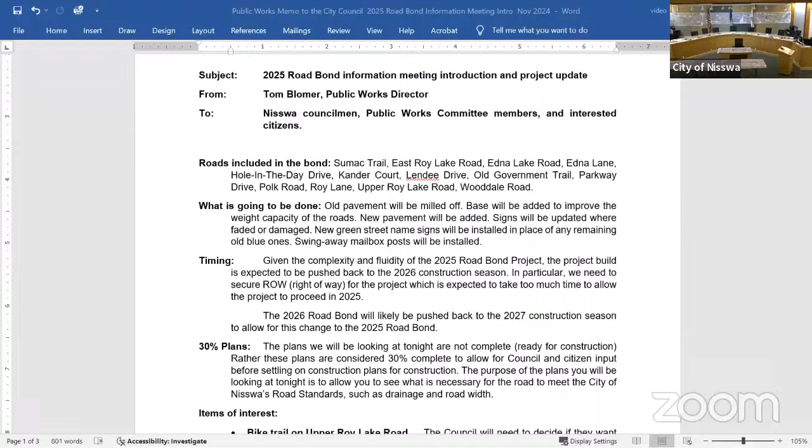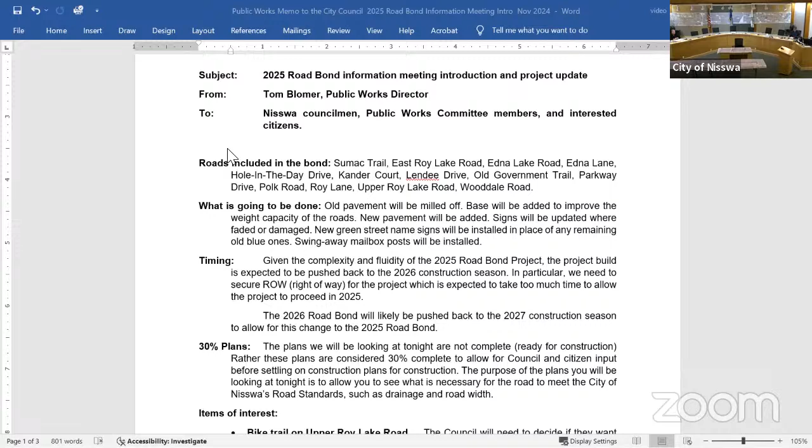So the first thing I would do is just let everyone know, and you probably are aware, the roads that are included in the bond. We're looking at repaving Sumac Trail, East Roy Lake Road, Edna Lake Road, Edna Lane, Hole in the Day Drive, Kander Court, Lendee Drive, Old Government Trail, Parkway Drive, Polk Road, Roy Lane, Upper Roy Lake Road, and Wooddale Road.

What the bond is hoping to do is we'll mill off old pavement, add base where necessary if there's been problems with the base of the road, or in some cases we'll be adding base to increase the load limit of the road.

You'll notice that in the springtime, a lot of our roads are posted as 5-ton right now. We've been going up to a 7-ton road with most of the roads that we've been resurfacing, and I think some of these will be getting that same treatment. Following the base correction, they will get a new surface put down.

Some other things that we would be doing with that, we'll be updating any of the signs that are worn out, faded, possibly damaged. If there's any street name signs out there that are still the old blue color, they're being updated to the same ones that the county uses, the green and white. They're a little bit bigger, a little easier to read.

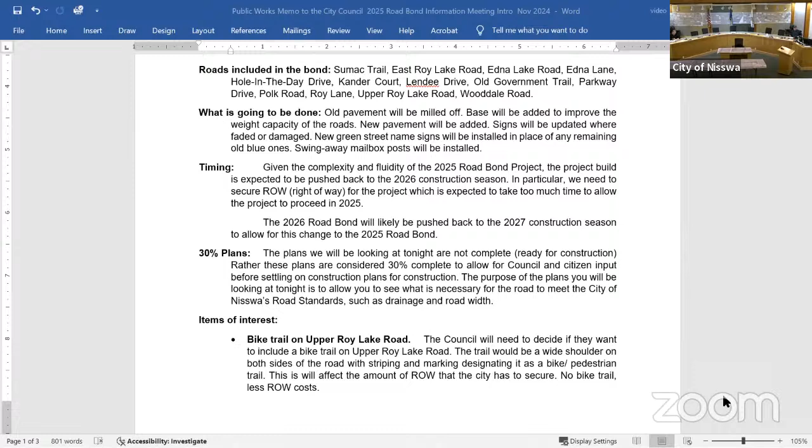Some things of interest I'd like you to be aware of: a bike trail has been proposed for Upper Roy Lake Road. That's not set in stone, but it's something we're considering, and there's a variety of reasons we're looking at that.

We would like to get your feedback on whether you believe that's a good idea or not, or if there's a type of bike path you'd prefer. Right now, what we're considering would simply be a wider shoulder on both sides, one-way traffic in each direction. It's only on Upper Roy that we're considering that at this time.

But if somebody here has a roadway you'd like to see a bike path on that's not being considered, please let us know. Either way is fine. Nothing is set yet, but we would like to get your input on that.

Other things, like I've alluded to already, there are issues with right-of-way acquisition. Most of the city streets in Nisswa don't have dedicated right-of-way, especially the older ones. They're there by what's called a prescriptive right, meaning they've been there for more than 15 years, and so they maintain a right-of-way by that.

When we go to look at right-of-way acquisition, the engineers will show where that acquisition is needed, and the city attorney will work on the best way to secure that, with the help of the surveyor from Widseth.

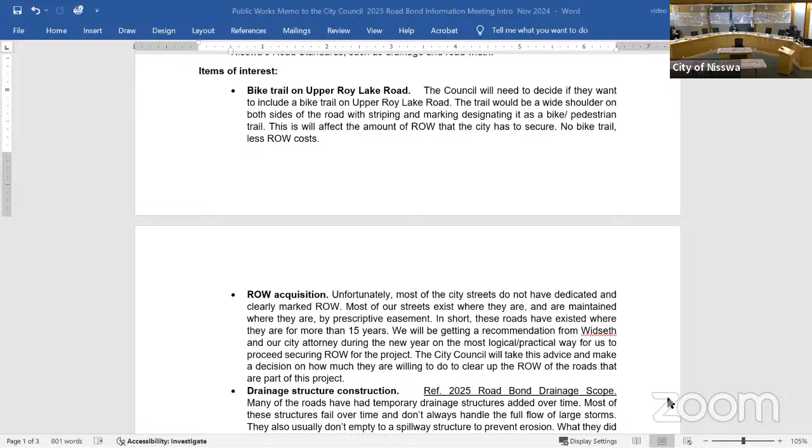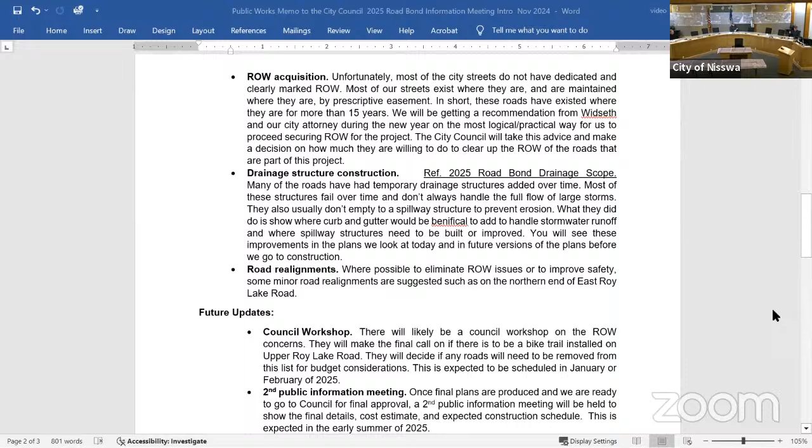Anyone where we believe we would need to acquire right-of-way will be contacted directly. You won't hear about it in a meeting like this. You'll be contacted either by phone or mail with the details where we would like to engage you about right-of-way.

Some other things to be aware of as you're looking at this: I think many of you are aware that there's asphalt gutters on a lot of the roads out there. For instance, Upper Roy and Edna Lake Road have asphalt gutters on the steep hills.

We're looking to add more permanent structures. Most of those asphalt gutters were added as afterthoughts; they were temporary in nature. Temporary in a lot of cases when it comes to roads can be 20 years old. But I think we're looking to do something more permanent to prevent erosion and handle heavy rainfall events better than what they have.

So if you see anything here that you have a question about, how we're handling that drainage, please let us know.

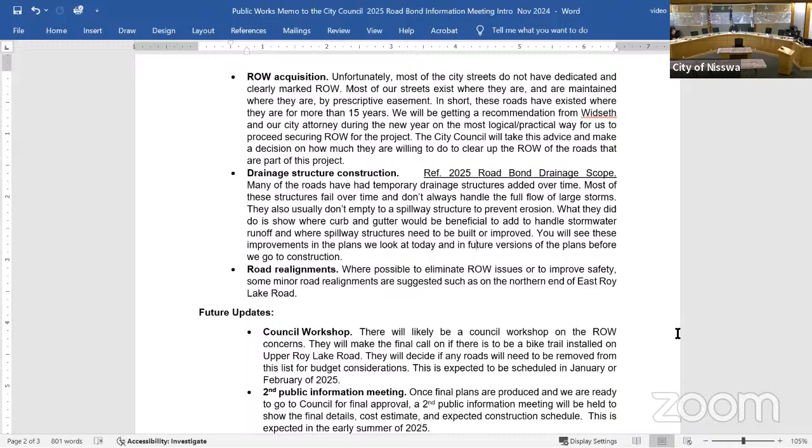One last thing to be aware of: there are some minor road realignments. In some cases, it's to eliminate some of the right-of-way issues I've talked about already. It may also be to improve safety, or simply improve visibility, or in a lot of cases you might have roads that come together at an angle other than 90 degrees, and in some cases we're trying to bring them together at 90 degrees, which is a safety issue.

One last thing, I want to give you an idea of what our future updates will be after this. Some of these right-of-way issues will be worked through with the city council in a workshop, either in January or February. That's subject to their approval and schedules, so I don't have a date for you yet on that.

As I mentioned earlier, before we go to final acceptance by the council, there'll be a second public information meeting like this, where you can see the changes made after your comments from tonight.

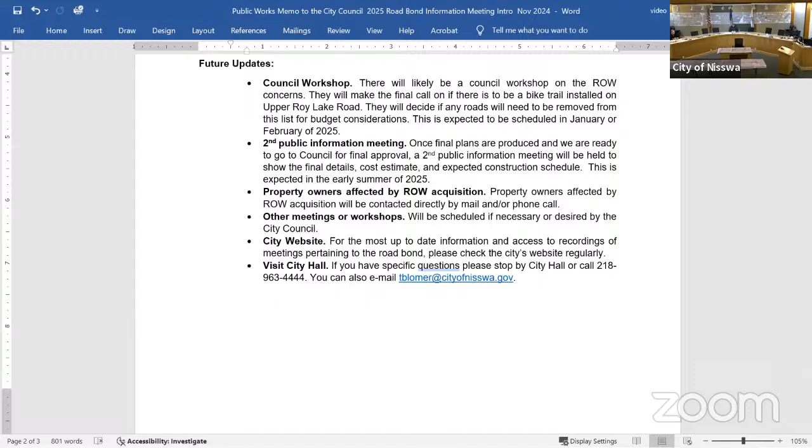Joe, do you have anything you'd like to say before I turn this over to Widseth? No, I don't think so. Do you want to go back and approve? Maybe one housekeeping thing, Joe — we'd like to approve the minutes from the October meeting before we move into the presentation. We have Cam and Galen here too, on Zoom. Second. I'll second. Thank you, Galen. Okay, minutes are accepted.

With that, Bill, do you want me to jump in with your presentation on the project? Sure, just sit here or doesn't matter? Whichever you prefer, if you want to be at the podium or there, whichever works better for you.

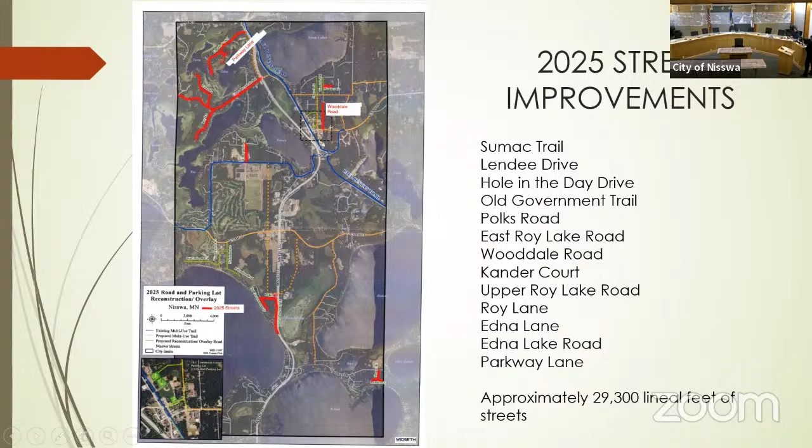Like Tom mentioned, some of the issues we looked at when doing this — the big one seems to be drainage for all the roadways. The other thing that popped its head up is right of way. So those are our biggest issues. I mean, other than that, there are always some little things that occur when we're doing the design — signs, utilities, stuff like that, that will always show up too.

Like you talked about drainage — one of the big things we look at is that when designing the roadway, coming up with an alignment and profile, we want to get the water off the roadway as quickly as possible, or prevent it from making it to the roadway at all. Ponding reduces the lifespan of the pavement, especially bituminous. Water and bituminous pavement don't really go together very well. It can deteriorate the pavement, get into the cracks, and cause structural damage which weakens the pavement — and that's when you see potholes and alligator cracking.

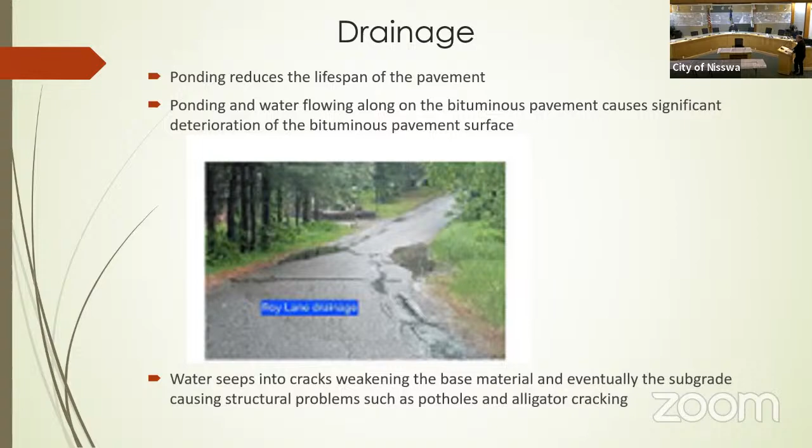One of the things we've noticed a lot when viewing the streets in Nisswa is kind of a bathtub effect — the water seems to drain towards the roadway, along the roadway, and then eventually drain off. But in this situation we show here, where the red line is the existing roadway, that's not the best situation. So that's some of the stuff we're trying to correct.

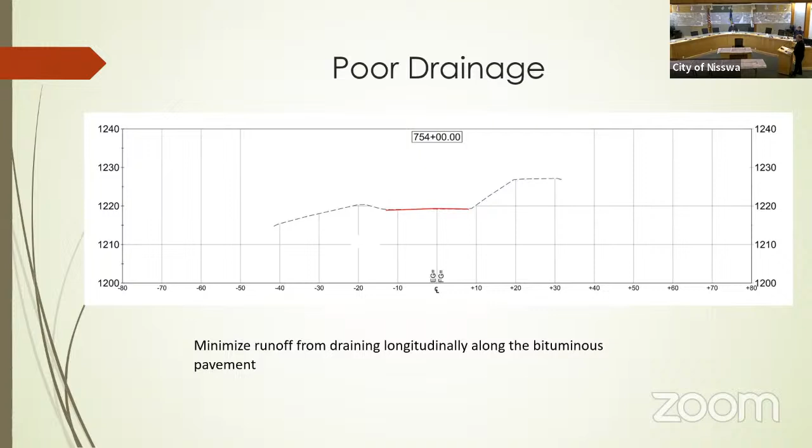Like Tom mentioned, we're going to try to control the runoff toward and along the paved surface of the roadway the best we can, using ditches. The ditches will be minimal depth, about a foot. If we get to a place where we need a culvert, the depth will increase in order to get the pipe under the road or under a driveway, maintaining roughly a foot of cover over the top of the pipe. And then we're going to add concrete curb and gutter.

Tom mentioned the bituminous gutters that were put in. Like I said before, bituminous isn't really meant to carry or transmit water very well — it deteriorates the fines on that surface, and over time it just breaks down. Whereas with concrete, you can set the grade a lot flatter, and it controls the runoff better and drains it away much more easily. A lot of times when you introduce concrete curb and gutter, you also have to add storm sewer in order to get the water off the road, out of the gutter, and into a ditch, pond, or some other location.

The other thing too is in a lot of areas the road is up a little bit higher and the grade slopes away. So we would maintain that, and the water would still drain the way it currently is draining right now.

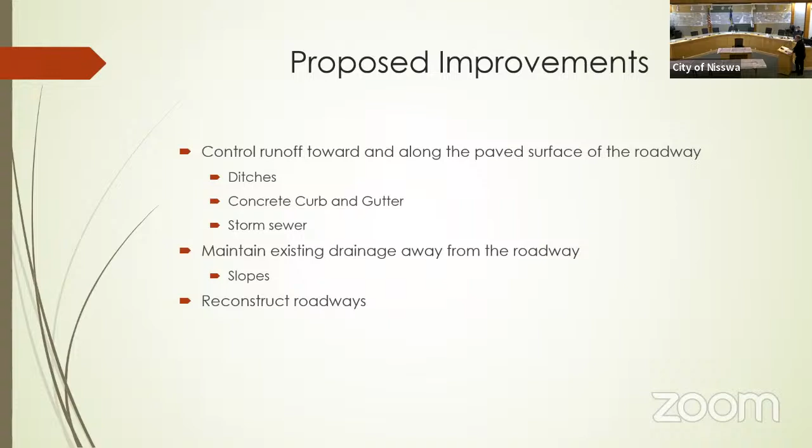For the most part, most of the roadways are all going to have a different setup, they may have a ditch, they may have curb and gutter, or they may slope away. And that's kind of what this picture shows.

The curb and gutter is usually put in to transmit the water up and down the roadway longitudinally, and also to reduce the amount of grading. The idea of the curb and gutter is that it minimizes the grading that has to occur behind it if there's a hill coming down.

So in this picture here, if we had to build a ditch where that curb and gutter is, we'd be out considerably further than what we're showing right now, based on looking at the other side of the roadway where a ditch is put in.

The city kind of wanted a little bit of a boulevard there so that the roadway or the grade doesn't come down to the back of curb, for snow storage and a place to put any signs that we needed.

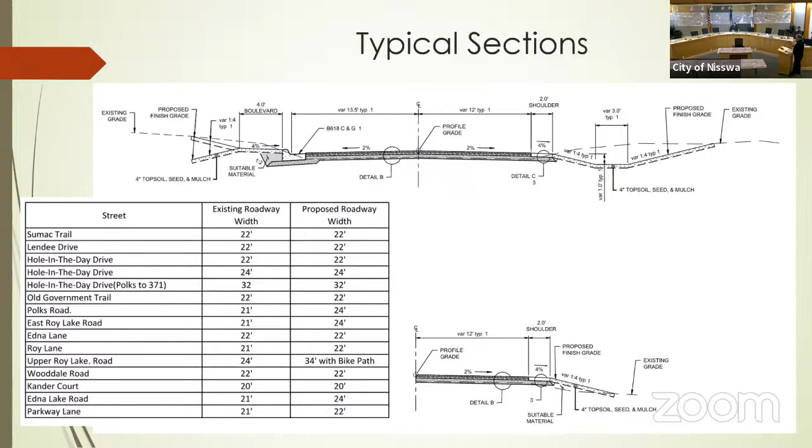That table kind of shows the proposed roadway widths for each street. Like I said, for the most part we're not really increasing them too much, except for Upper Roy Lake Road, which is the next picture.

So the typical section for Upper Roy Lake Road with the bike path is two 12-foot lanes, a 5-foot bike path on both sides. And then in some cases there's always going to be a shoulder, but in some cases it might be curb and gutter in order to match the grade on either side or to provide drainage.

5 foot is like for a bike path one way, that's the recommended width. It could be decreased to 4, but the recommended width is 5 feet.

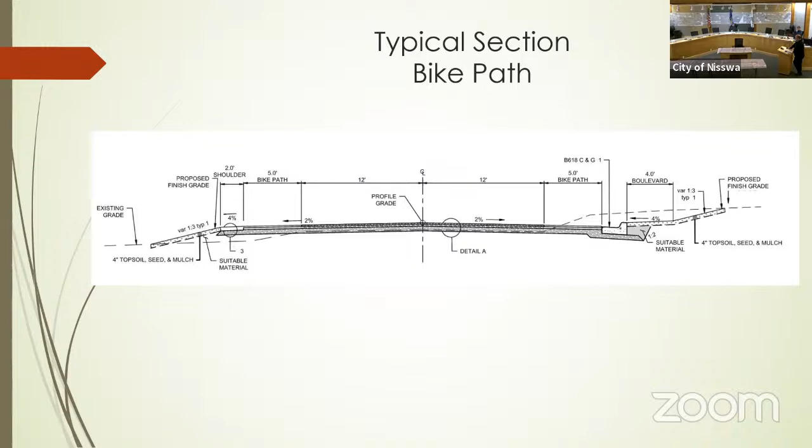We talked about right of way, and unless people have specific questions, I printed out some stuff from the county. So what we've done for the right of way is on streets where Widseth has information regarding right of way or easements or plats that we've done over the years, we've incorporated that into the drawings or into our base mapping. In some areas, we don't have that information.

That's what we're talking about, the right of way as being possibly a problem or an issue. So we've tried to create a map that kind of shows the existing right of way. In a lot of cases, it's a combination of the county's information and Widseth's survey information.

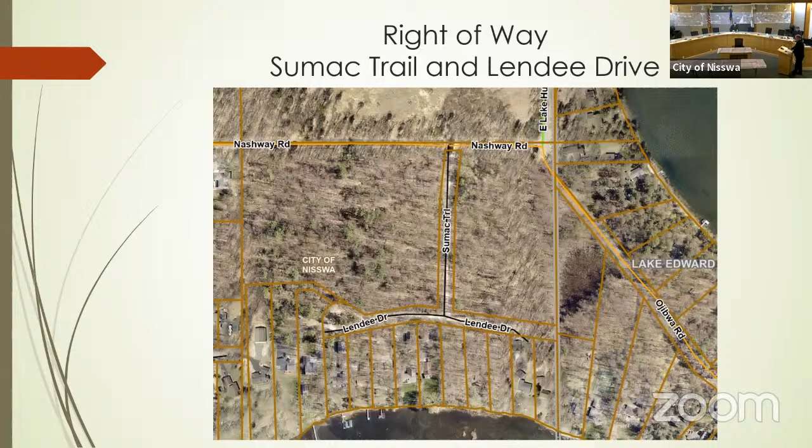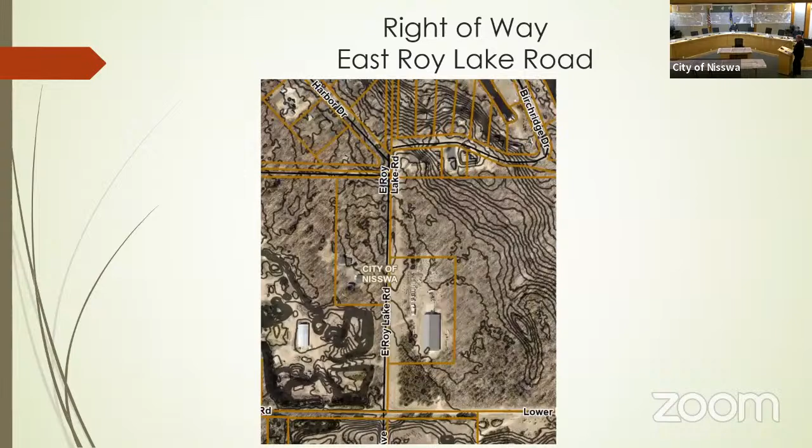Edna Lake Road, Parkway Lane. Edna Lake Road has right of way from, I don't know, the south part going up to Fawn Lake Road. That's very similar to East Roy Lake Road. I'm getting confused with all these Roys and Ednas.

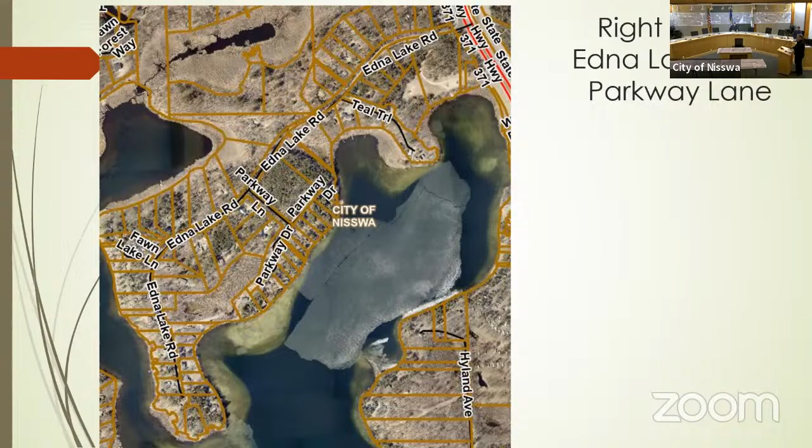So then from Edna Lake or from Fawn Lake Road all the way out to 371, there's dedicated right of way, but it varies throughout there. Some places it's wider than others, and that's some of the issues that we're going to have to resolve.

Upper Roy Lake Road, that one varies in right of way width, similar to East Roy Lake Road, where there is none, and then in other places there's like 30 feet, 33 feet. And in some places there might be 66, but it jogs in and out all over.

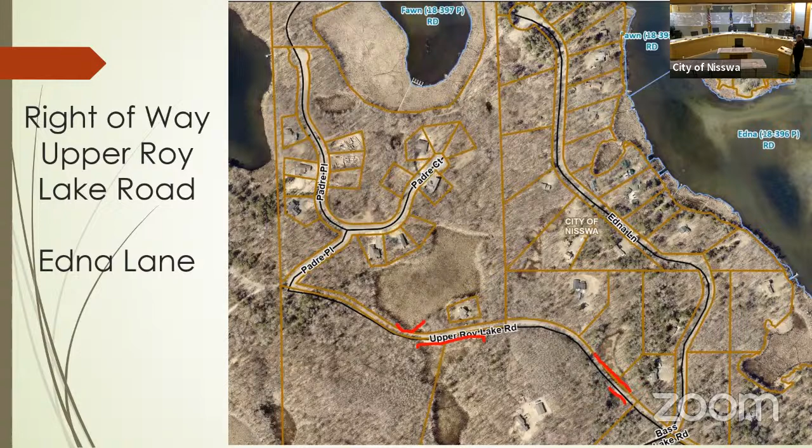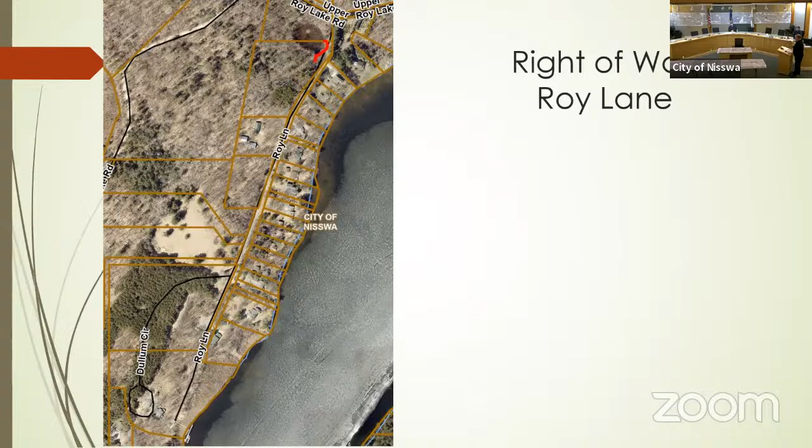Right of way, Roy Lane. Similar on that one where at the south end, it's basically the right of way of the property goes up to roughly the center of the road. And north of a certain point, there is a dedicated right of way, but it's not 66 feet.

So basically, that's it for the presentation. I guess I can go through the roadways one by one. We'll just start with the first one on the list. Pick one.

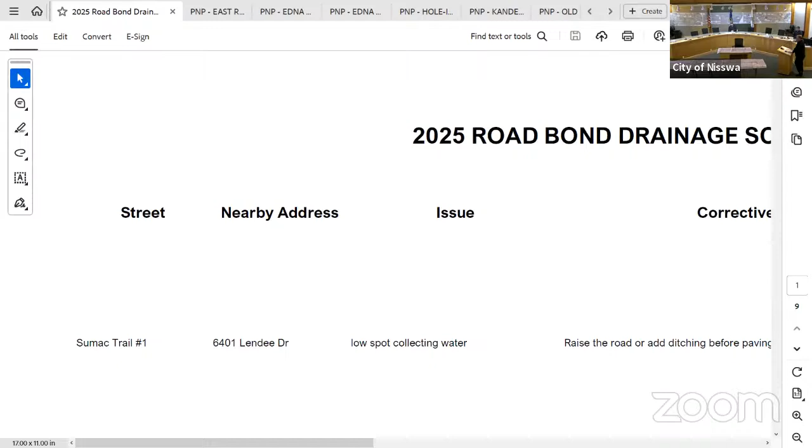On East Roy Lake Road, what we're seeing, again, it seems like the big issues are the width of the roadway, which is 24 feet from edge to edge.

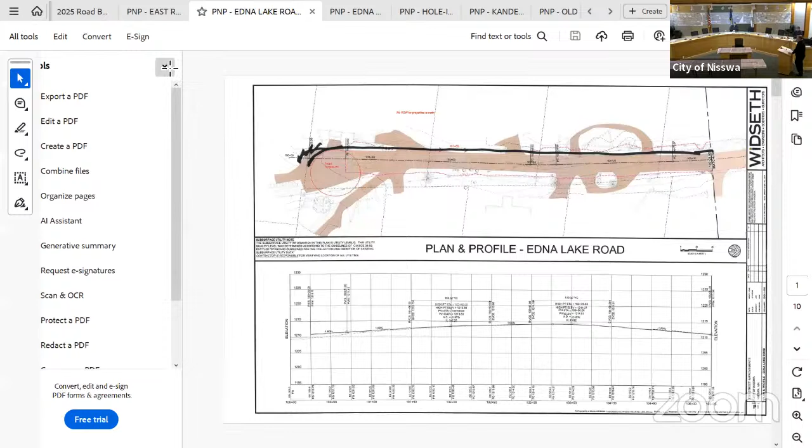That's a different one, so actually, next slide, go back to East Roy Lake Road, there's more than one in there. Similar to here, so you can just see where the ditch roughly ends in order to make the grade work, and the profile. Go to click another.

And so what we tried to do here is kind of put in a sweeping curve. It seemed like what we noticed was that most of the traffic and the people live to the west versus the east, and then to the east is a dead end roadway. So the idea here was to make it more of a free flowing roadway and connecting Birchdale or Birch Ridge into East Roy Lake Road.

There's another option, which I don't know if...

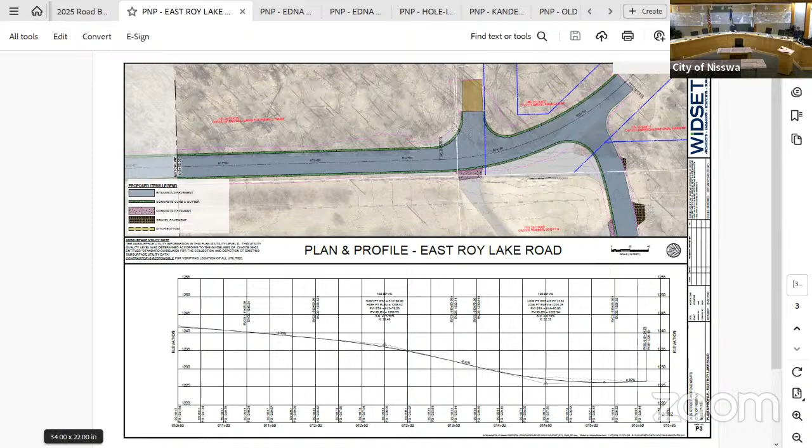Quick question there. Are you gonna accommodate still for all the mailboxes and the pullover for all that stuff at that intersection? Yeah, we were trying to figure out the best place to locate it because it's right exactly where the curve is. Thought is to move it to the south a little bit before the curve. Yeah, cause that's always kind of a bottleneck right there at that intersection. Yeah, so if we move it south before the curve, then everybody would get it before they either have to turn to the right or go straight.

Or if you're adjusting the road, can you make that area wider so it's actually like a pull off, like a little park lane? Yeah, sure. A lot of times there can be 2 or 3 vehicles parked there. Okay.

Cause I believe there's roughly what, 30 mailboxes there? They show up on aerial photography. Yeah, there's a lot. So they're for both sides of the road then, because there's not even that many people to the east. Yeah, it just might be nice for those people there to just be able to pull over and let traffic go by or whatever. Sure.

So this one, very similar concept as the last one, just makes it into a T intersection. East Roy Lake Road comes up to Harbor and Birch Ridge Road, which kind of intersect. This one would probably end up being more of a three-way stop, I guess. But it's a similar concept, kind of improves the geometry of the intersection.

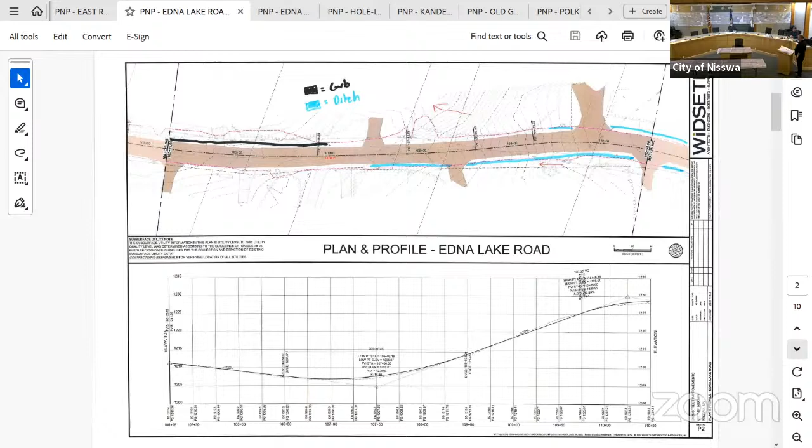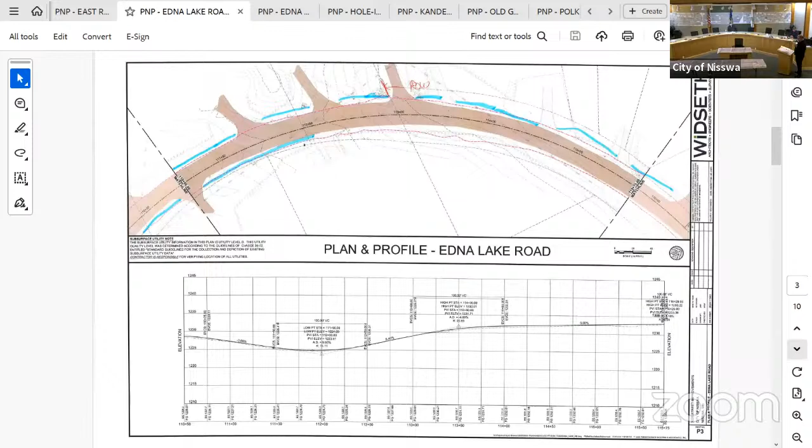Then we looked at the cross sections for the roadway and determined that the black line is roughly where the curb and gutter could go, and the blue line is kind of the ditches and stuff. What we're always trying to do is minimize disruption and maintain the drainage, and think about where we're going to outlet a ditch to. If we put in curb and gutter, that has to drain off someplace too. So that's some of the thought process, I guess.

So that's what we did up and down the roadway. The blue lines will probably end up being connected together, but where there's a gap, it's probably from a driveway.

The crosshatched area in that one spot on the previous slide, that's wetland delineation. That's been delineated by Widseth.

I think what we'll end up doing is - right now we're showing the 4-to-1 slope from the standards. We're probably going to decrease that to 3-to-1, and we could probably stay out of the wetland.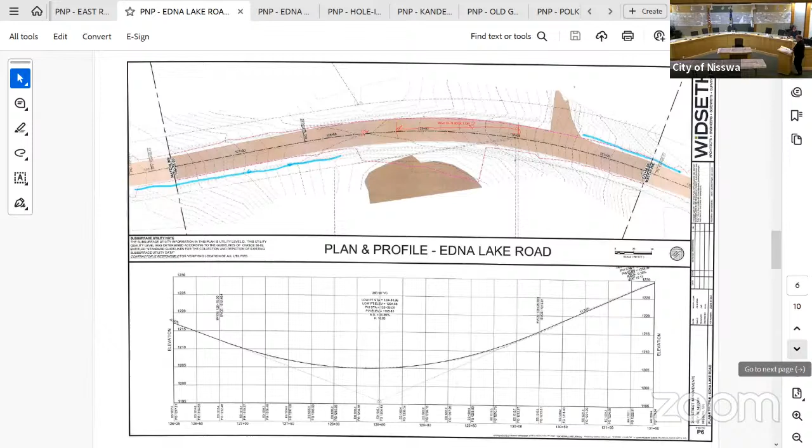Again, just kind of showing, and then as we get out towards 371, it seems like the thing to do is to connect onto the curb and gutter that's there now and extend that up to the north, so that we can try and collect that water before it gets there. We can control it on the road in the gutter and prevent it from running along the edge of the road. And because the slopes kind of go up along the edge, it helps with the grading too.

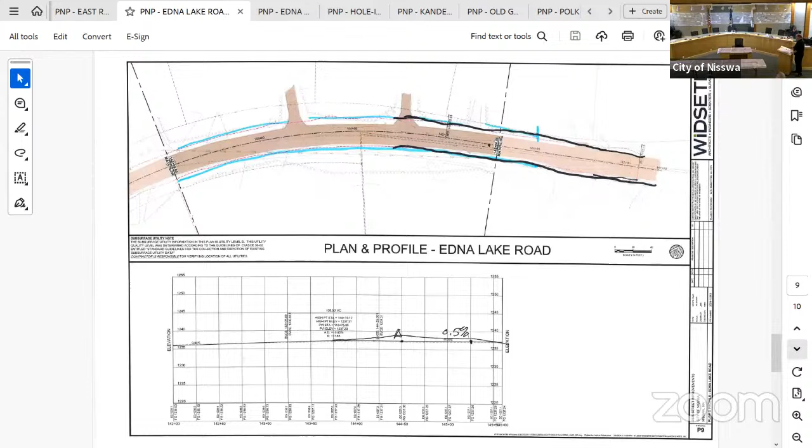That's just the same picture as before. So that's the idea with Edna Lake Road.

This is Edna Lane, coming off of Upper Roy Lake Road to the north. The idea on this one is it's just like a lot of the roadways on the east side of that road. There's an existing bituminous valley, I guess you'd say, and the grade kind of does go up from the roadway up a hill. So another one of those instances where replacing that valley with curb and gutter basically on the east side, and then figuring out how to drain that water, collect it and discharge it basically down near that cul-de-sac.

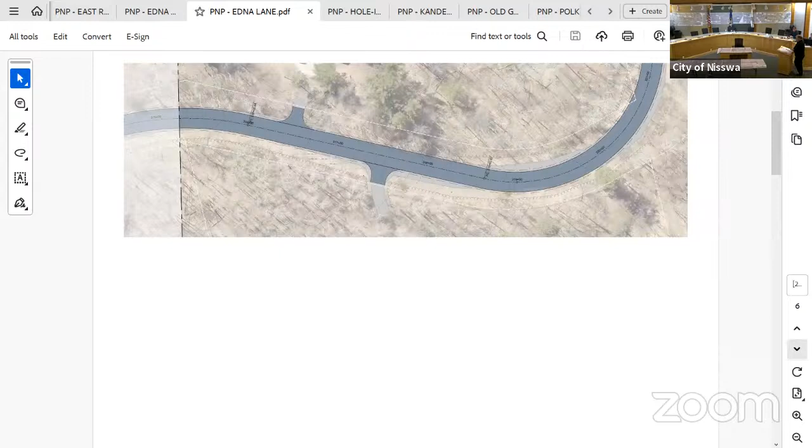That's what our proposed plan is. And then on the west side, the water will just kind of drain off and away. There's a couple of areas where we would probably add a ditch or something like that to keep the water draining along the roadway, so that it can be discharged appropriately.

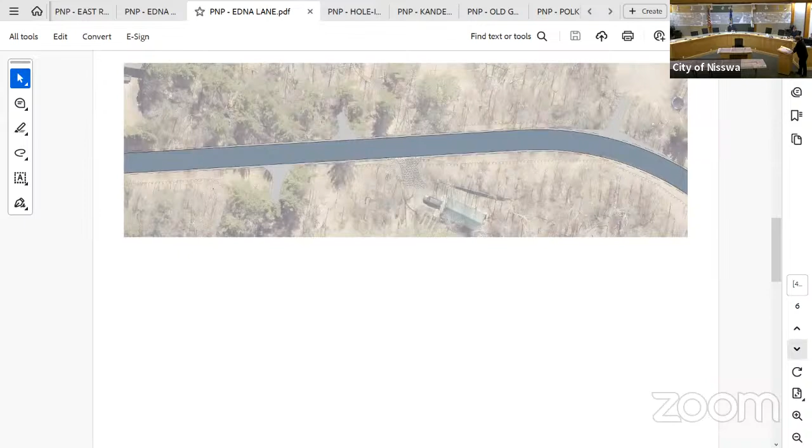There is a cul-de-sac at the end of this road that has that dirt in the middle. I don't know if we want to keep that, or if people are driving around and it's not a problem. Right now it's not a bother for maintenance or anything. I had no plans of removing it, I guess.

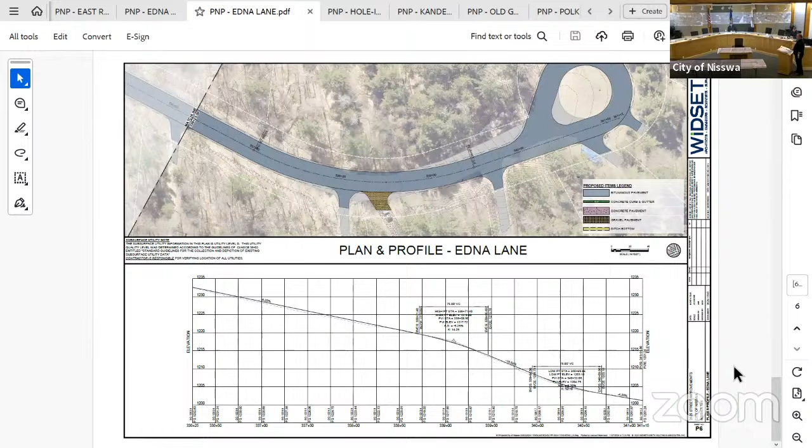Whatever the next one is. Hole in the Day Drive.

The idea with Hole in the Day Drive is that, well, let's talk about the right of way a little bit. The right of way on this one is MnDOT. MnDOT and the city of Nisswa own to the west side of Hole in the Day Drive. Nisswa does own a portion of that, but it's not 100% clear as to what they own and where MnDOT starts and Nisswa owns, because on MnDOT's corridor study, they show that as all being theirs, but I don't know if that's totally true.

MnDOT has a proposal for Hole in the Day Drive to extend around, basically like a frontage road further south. So we're probably gonna be in contact with them to talk about how that connection occurs right there where the curve goes in.

So the idea, gotta find my notes here. Hole in the Day Drive is that on the east side, basically the water just kind of drains off the road down the slope towards the MnDOT ditch along 371. And we're not really gonna change that concept.

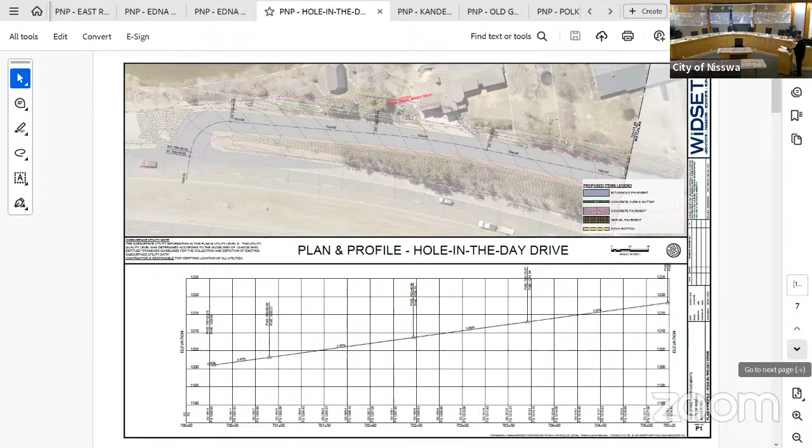So on the west side, we're going to be adding curb and gutter and ditches to collect the water and convey it along the roadway, and then possibly using storm sewer directed towards the Trunk Highway 371 ditch. MnDOT's usual plan is that they don't really like an increase in discharge, but in a way, we're not really doing that. If we are, then we can try and pond some of it or store it before we discharge it into their ditch.

So from the south to about the first 1,000 feet, we're gonna put curb and gutter in there. There's a low point for about 200 feet where the water kind of goes to now or drains to now. So that would be where we're gonna continue to pond the water.

And then again, the curb starts up again and runs another 800 feet or more to the north where again the curb would end. The road is up a little bit higher and the water sheds off on both sides.

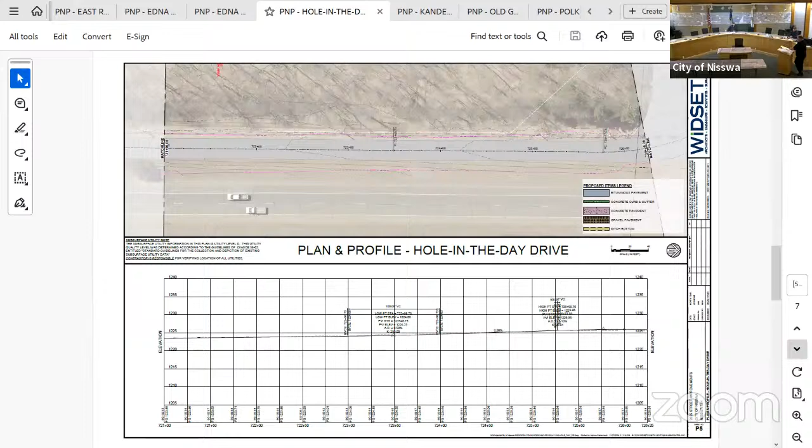And then as you get towards Polk's Road, the roadway width will increase from 22 or 24 feet to 32 feet as it goes and connects into 371. And that would be, again, a rural section of the road, up pretty high, and it'll just slope off on both sides.

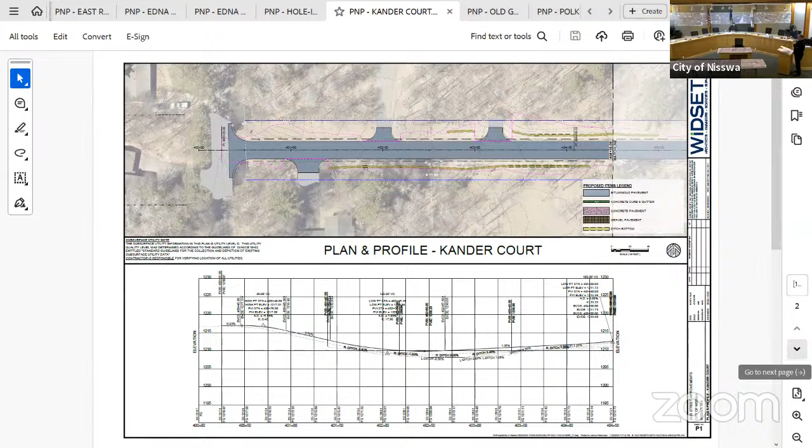We have right-of-way information on this one, but the plan is to keep the roadway where it is. Just can't remember if we're widening this one or not, but basically keep the roadway where it is and maybe adjust the profile a little bit to get the drainage to work better so it's not sitting right along the edge of the road. Then add some ditches along the roadway in order to convey it to the low point. We might have to add some driveway culverts underneath the road, keep the cul-de-sac the way it is. That water tends to drain to the southwest, I guess.

Of all the roads, this one, again, we're in the right of way. The cul-de-sac is a little bit smaller than the city standard, but it would stick out a little bit out of the right of way here.

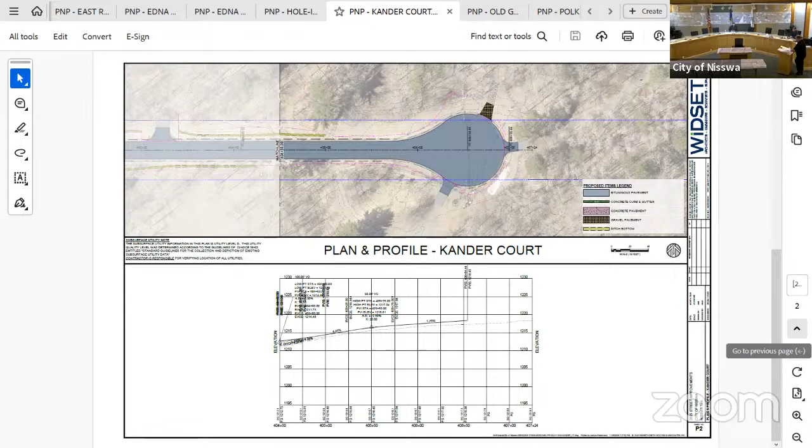Old Government Trail. This one is a little bit different than some of the other ones. The property to the east is kind of like a common area, basically owned by the people on the west side. So what we're gonna do is, the roadway drainage seems to be from west to east, so we're gonna tip the roadway so that it continues to drain across the road and then into a swale along the east side of the road, and then have that discharge into a low area over by Polk's Road.

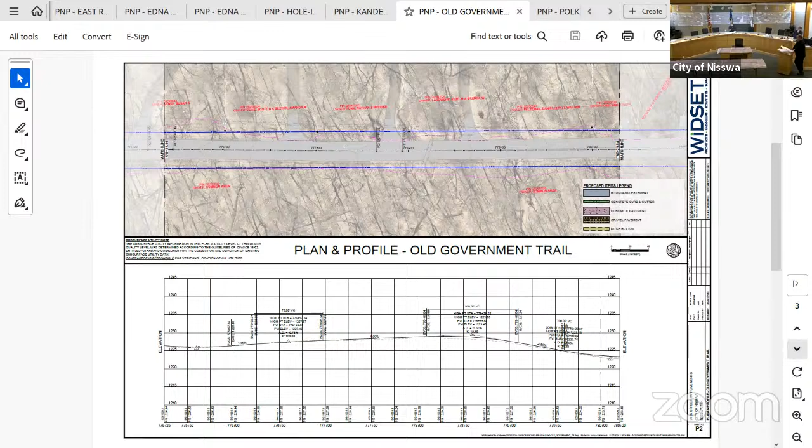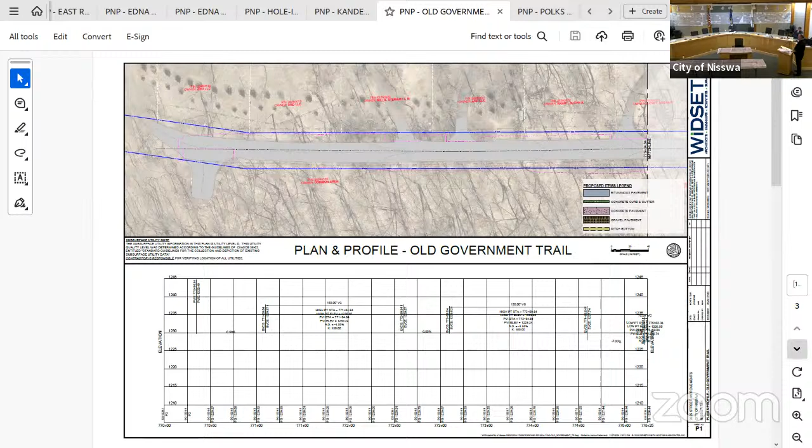And then just maintain that, I don't know, you call it like a hammerhead at the end. Yes, just pave that out. We try to fit that in on some of the other roads too, but it's that hard.

So this is Polk's Road. This one has right of way on it, but the road isn't really centered in the right of way that's there. So we might have to acquire right of way in order to build the roadway and do some of the grading. So that's another one of the right of way issues that we have to talk about.

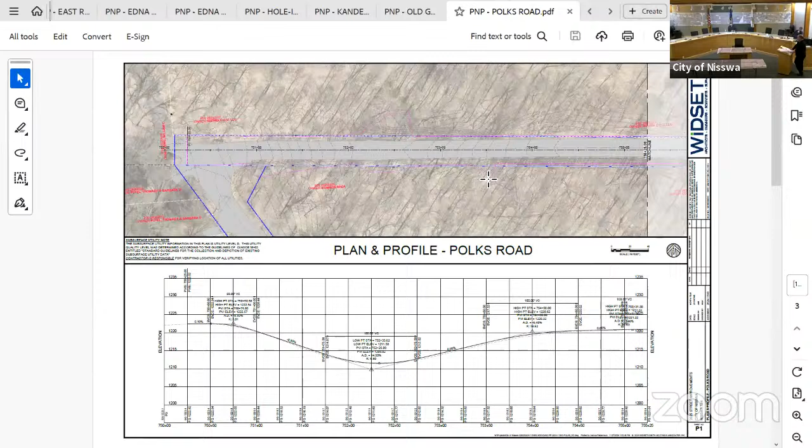The idea with this roadway is that we're going to end up putting in, again, curb and gutter. A lot of the roadway slopes to the north or to the south. There's an area where Polk's Road kind of carves through the top of a hill, that's where we're gonna put in curb and gutter. That's basically the definition of that picture I showed earlier, with the water draining straight down to the edge of the road and draining along the edge of the road.

So Polk's Road will have curb and gutter for a portion up near the top of the hill, and then there might be some ditches along there, but it's not really that bad. Then it connects in with Hole in the Day Road. We're looking at that intersection a little bit to see if there's something that needs to be done there to modify it, but nothing major. Just because right now it's kind of a sea of pavement and doesn't really align with Hole in the Day Road very well, as far as traffic going from north to south or south to north.

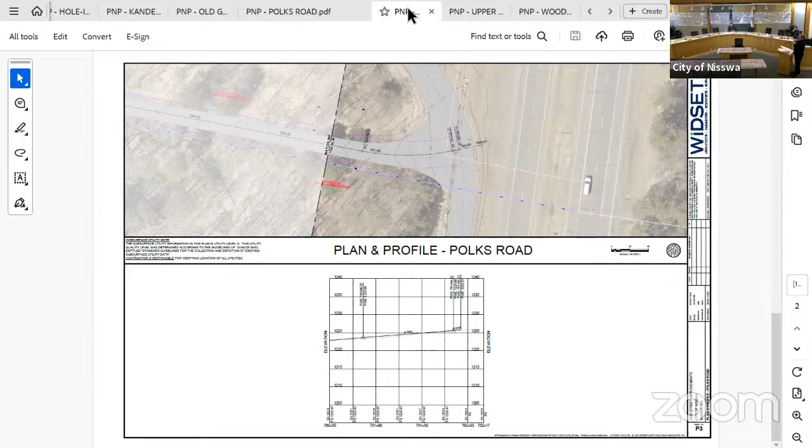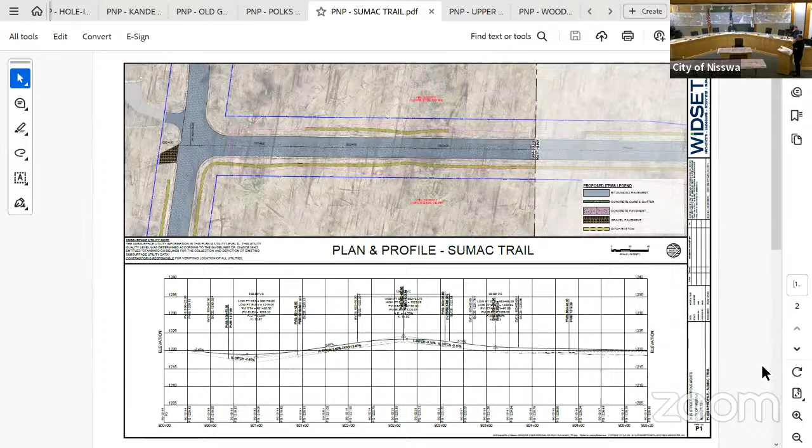Sumac Trail. So this one, we have right of way for this one. This is an existing gravel road. We're gonna move the road to the center of the right of way and then construct — there's not gonna be any curb and gutter on this one, but we'll construct ditches in order to convey the water. And then a lot of the water is gonna kind of empty out right in the middle there, just to the right of those red names, and then the rest of it will end up going down and discharging into the county ditch.

As far as that goes, we'll end up raising the road, raising the profile, regrading it so that we get the water to drain away, keep the ditch profile, and try to keep the water off the road.

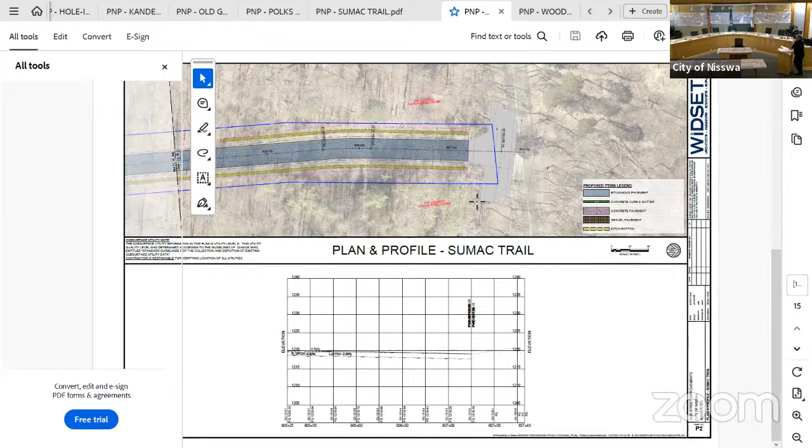Oh, this is Upper Roy Lake Road. So this is the south end — or no, not the south end, the west end.

So there's a kind of a hill at that red line - the red line shows where the curb and gutter would go. The idea is to define that radius a little bit better, and this will allow us to match the grading on the hill in that corner.

Then there'll be a ditch along the south side of the roadway that would extend to the east. There's a low area about 500 feet to the east that it would outlet into. There's actually a wetland complex up in that area too. So for the most part by the wetland complex, the water sheds off of the roadway down the hill on both sides, right in there where the two red lines are, curb and gutter.

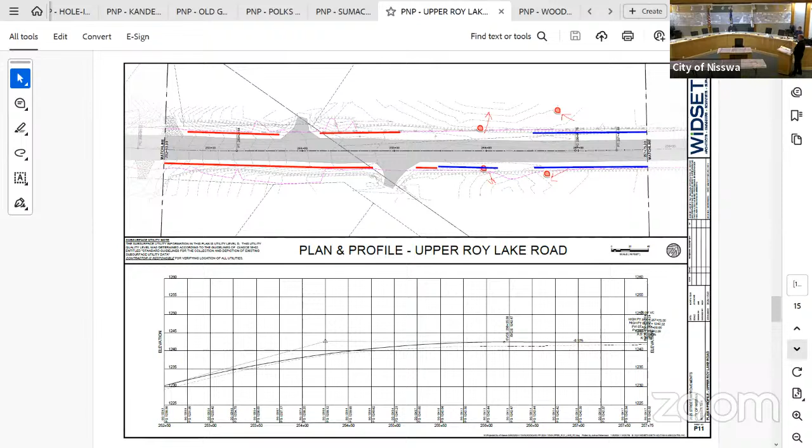So we'd end up putting in - that water would collect, again just like before. Usually when there's curb and gutter, that means the grade on either side of it is high. That seemed to be the best solution short of putting in a ditch, which would require cutting back the hill to make it work. Again, more ditches, and some curb and gutter as you keep moving south. So the whole concept is you'll have curb and gutter and ditches to convey the runoff.

This is out at 371. Like I said before, the right of way in here is very - varies, I guess would be a good word.

Thinking about putting a bike trail on that - yes. What's going to happen when you run into Cass County? So when it gets to Cass County, that would be Lake Shore's right of way. If there's going to be a bike path that continues that way, Lake Shore would design it and build it.

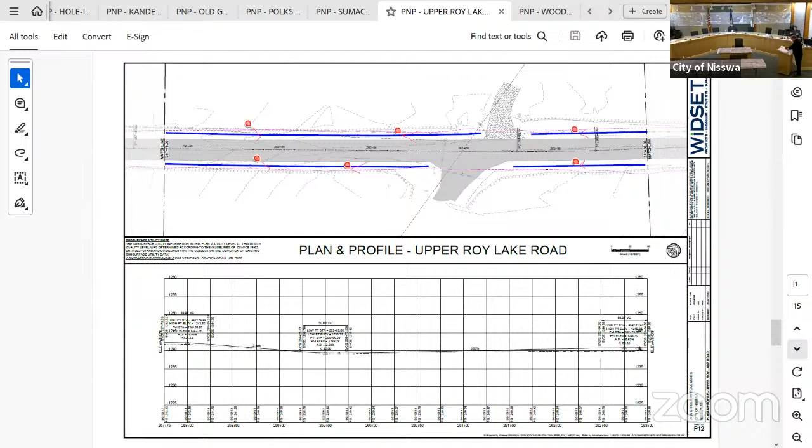It seems like it would be a lot tougher on the Cass County part of the lake. I think you're probably right - we haven't really looked at that in this committee, since trails are more handled by the Parks and Trails Department. The only reason we're looking at it here is because we're reconstructing the road. If you're familiar with the new part of the trail built on Lower Roy Lake Road, we didn't reconstruct the road at that time - the bike path was just added. In this case, we're doing it all as one piece, which provides some construction efficiency.

If we so choose to add that path - the Parks Department and their committee have looked at the city of Nisswa from north to south, and given us what they feel are the logical places they'd like to see bike paths added. This is one spot. Some others they'll probably add eventually include a bike path on Church Street and possibly on Poplar. There are a few others, and unfortunately Amber Peterson, our Parks Director, was planning to be at this meeting tonight and could have answered this question better than I am. But really the best way to think of this trail on Upper Roy is that it will probably take 20 years or more to get the loop built.

One thing with roads is the timelines we deal with are very long. One reason we're looking at the drainage and the condition of the base is we're trying to make all the roads fit a 30-year repavement cycle, so the city is able to come in and repave them roughly every 30 years. We're making investments in things like curb and gutter to help them last longer.

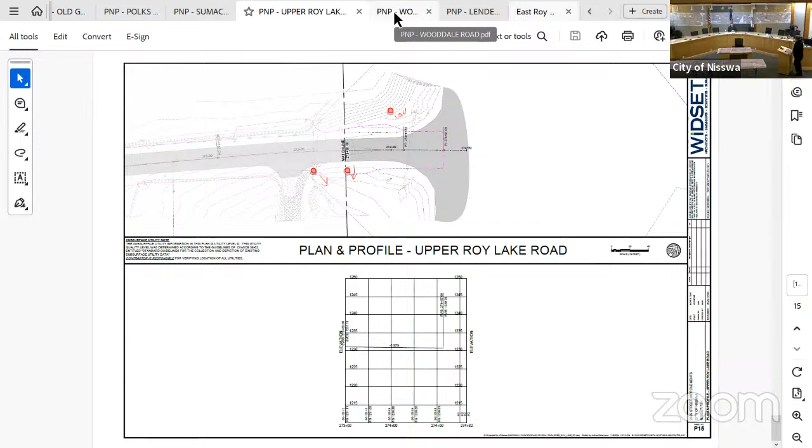If you look at some places, for instance on Edna Lake Road, there are spots where the pavement is only this thick, and so it's busting up. There are other places like that through town, but we're going to consistently have 3-inch pavement thickness when this is all said and done. Obviously we can't afford to do everything at once, so we're picking off chunks of these roads about every 7 years. The way we're deciding which roads primarily go on this bond is the oldest roads are getting done first.

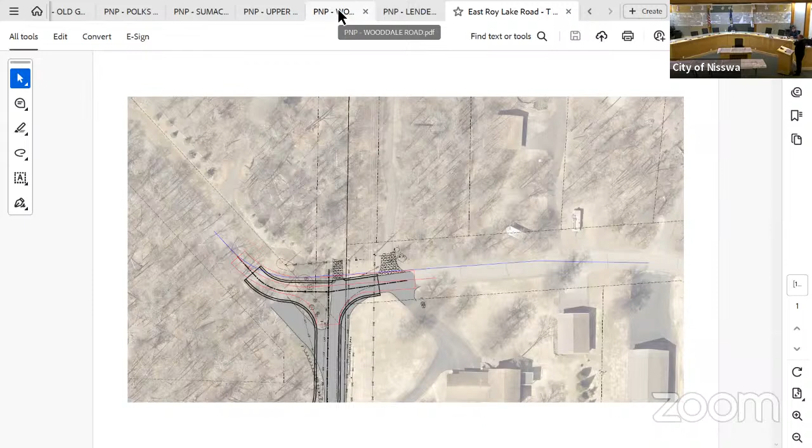Something I forgot to mention is on East Roy Lake Road, because of the trucks that seem to drive on that roadway, we've increased the pavement section slightly to accommodate what we estimated to be the truck traffic. So we added another half inch of bituminous and 3 more inches of aggregate base just to account for that.

Wooddale Road - again, the right of way on this one is very similar to the others, where the road is owned up to the center of the roadway pretty much the whole way. It's that prescriptive rights thing that allows the roadway and utilities to be in there. There's sanitary sewer down the center of the road. The idea here, similar to all the other streets, is to try to get the roadway to the right elevation to maintain drainage and convey the water in some direction.

So you can flip to the next one.

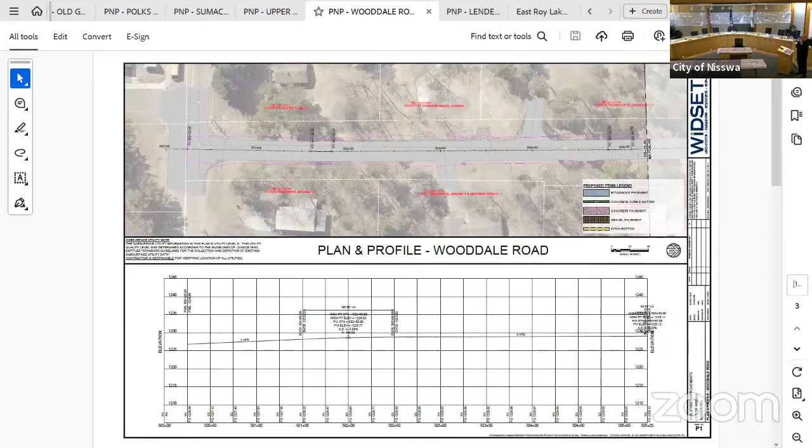Is it just a road resurfacing? Well, no, we're going to end up milling off the pavement on all these roadways. The existing pavement would be removed. We'd probably regrade it to the subgrade elevation or the bottom of the class 5, then add class 5, and then the pavement section. So there is going to be some grading initially.

This project ends about 1,200 feet from Laurel Street, so it doesn't even get to the gravel portion. It stops right there.

Unfortunately with this, somewhere back in time before any of us who work for the city currently, they never built a cul-de-sac or any kind of turnaround, and they didn't go all the way down.

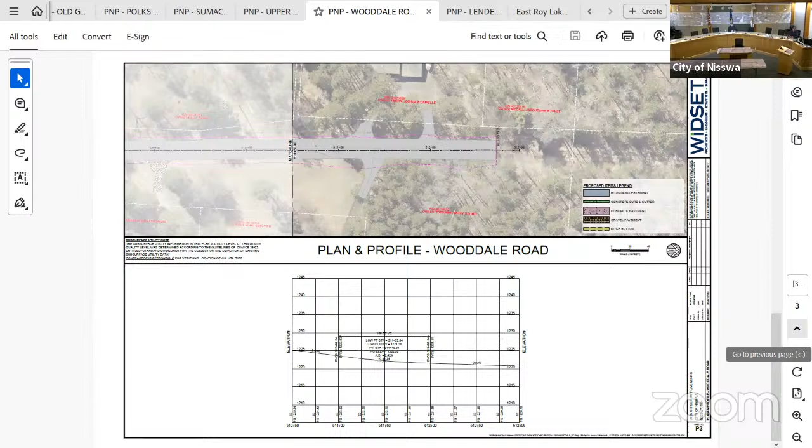Lende Drive - the idea with this one is we're going to maintain the loop, I guess, around the trees in the middle of the loop. The roadway width is, I believe, 21 feet around there, so we're going to maintain that. It basically becomes a loop road, not really a cul-de-sac, because of the trees.

We're going to minimize the grading and tree removal in that loop area, inside the loop. We're going to match the grades on the south side of the roadway and add ditches around, east of Sumac Trail. On the other side, the drainage tends to be such that the road's up high enough where the water will go either north or south, depending on what side of the road you're on.

Here, what we're going to do, in order to prevent issues, is create an asymmetrical cul-de-sac where it would go more to the north instead of the middle of the roadway. That way we can connect it into the driveways there better. If we have to acquire right of way, we're acquiring it from the property to the north - no particular reason, it just seemed like the better property.

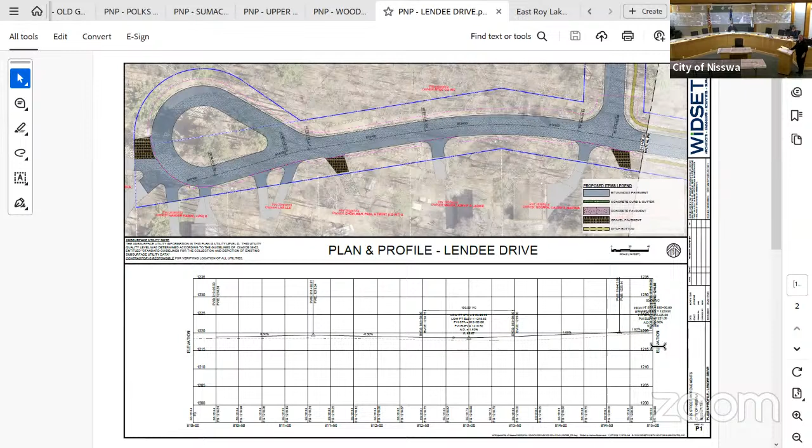Yeah, that's where that cul-de-sac is. Go to the next one. Yep, right there. That's east of Sumac.

To turn around, what we're showing is a 60-foot diameter. Right now, if you're familiar with it, in the spring that thing turns into a mud pit down there, so we're hoping to fix that. We've added gravel over the years, but I think this will be a better fix.

As you know, going off the edge of that cul-de-sac there's a pretty steep grade. Expanding that to the north, so it's not that great, that I think would be the idea.

The ditches basically are going to discharge to the east, probably go underneath that driveway, right there with the culvert. It'll probably be better now - when we're done, the water should just be in the ditch.

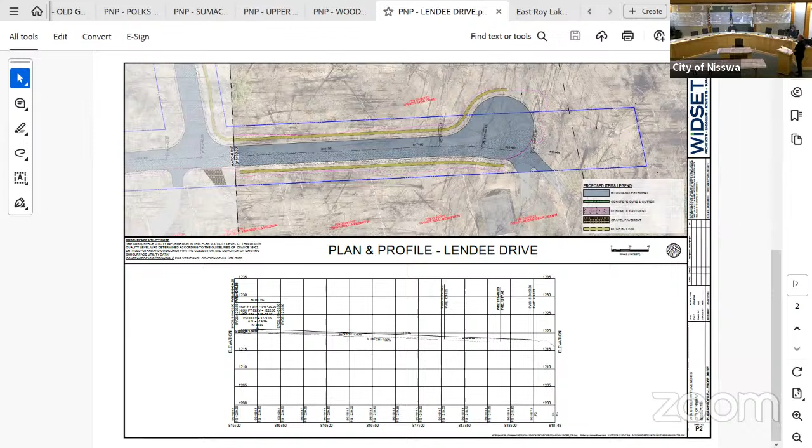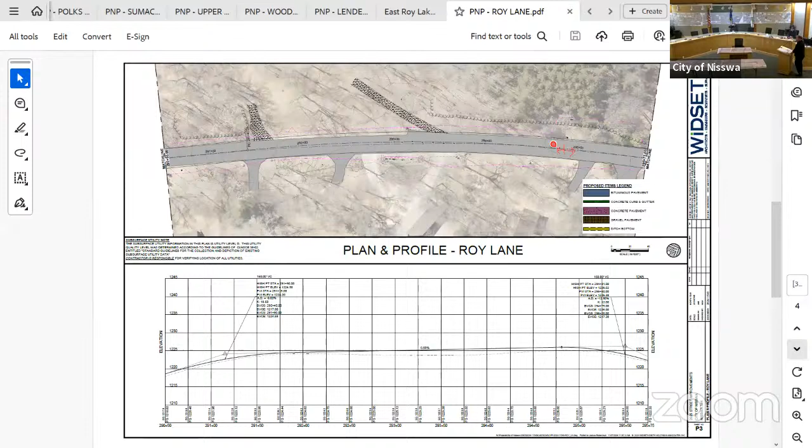There's some possible issues with, where we need curb and gutter, right in this area, where it's a little bit steeper, in order to get the water to drain across that guy's driveway to the north.

But for the most part, if anything is going to occur on the west side of the road, it would be putting in some ditches and swales in order to convey the water. One thing we did notice when we were out there is a lot of people park their equipment, boat lifts...

trailers on that side over there, so putting curb and gutter in there might create some problems for them unless we put in some type of surmountable curb or something like that. But right here where we're showing it, it's a steeper hill, nobody parks right there.

Again, there's wetland - that gray piece right there is a wetland. And again, I think we're going to stay out of that.

The right of way on Roy Lane is very similar to all the other ones, where there's a portion of it that's up to the center of the right of way or center of the roadway roughly, and then in other areas there's a designated right of way.

I don't know of any road other than maybe Sumac Trail that might be the only road where right of way is not really an issue. Oh yeah, we haven't gotten to that yet. I don't know, whatever one we got. Oh, we do? Yeah, that's it.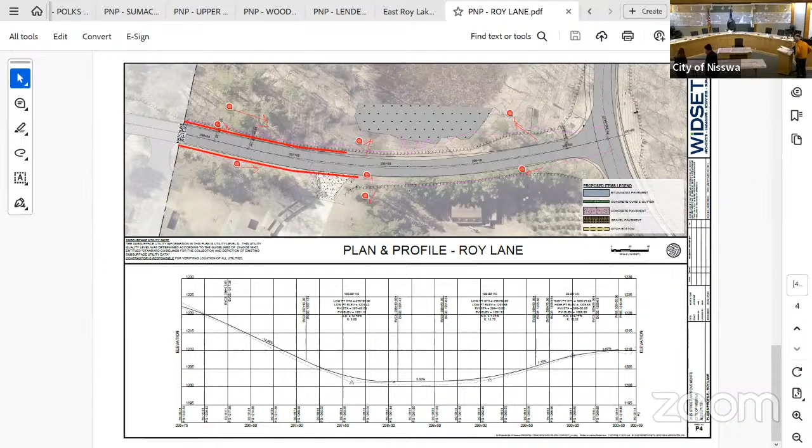Those green lines, was that the ditches? They're way off the road, aren't they? Yeah, right here. Well, it doesn't show it here, but that was on there, yeah. So the idea is that it's a foot at 4 to 1.